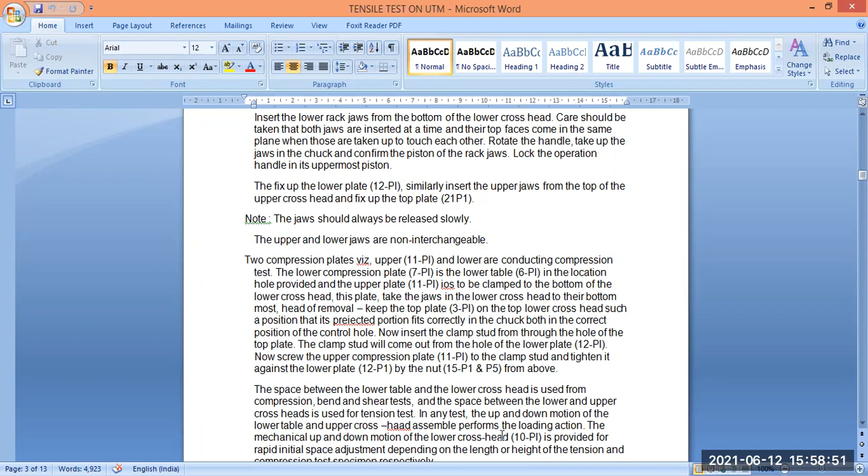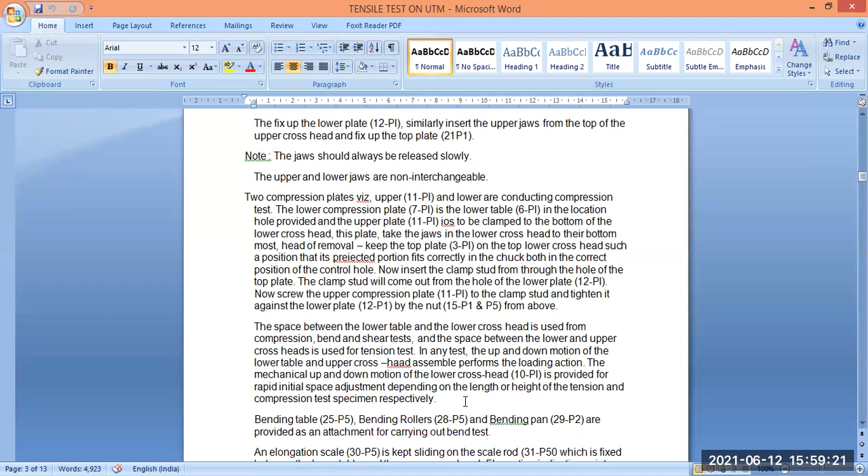The mechanical up and down motion of the lower crosshead is provided for rapid initial space adjustment depending on the length of the specimen for both tension and compression tests. The bending table, bending rollers, and bending pins are provided as an attachment for carrying out the bending test.

An elongation scale is kept sliding on the scale rod 31-P5, which is fixed between the lower table and the upper crosshead. The elongation indicating pointer is fixed to the lower crosshead and reads the scale on the side of the rod when loading the specimen. Limit switch 4 is provided below the lower table for indicating the maximum stroke of the piston.

So, what is that? A scale is provided, kept on the scale rod, which is fixed with the lower table and the upper crosshead itself. Actually, in our electronic tensile device, this doesn't operate, but this movement is available from our control panel itself.

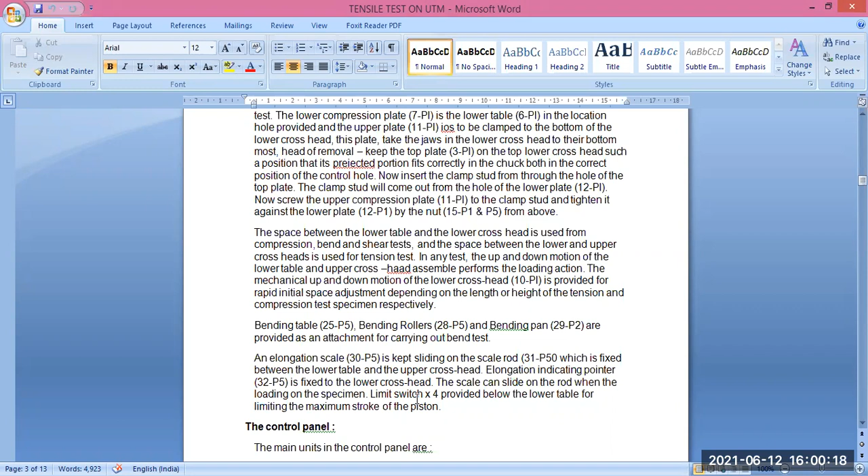So, the control panel: first of all, the main units of the control panel are like this. The oil tank, which contains the hydraulic oil level sight glass for checking the oil level, is fitted to the oil tank itself. The filter fitted to the oil tank cover filters the incoming oil to the tank.

The oil tank contains the hydraulic oil level sight glass, which can show you how much oil is there in the machine, or if there is any leakage. It is fitted to the oil tank for checking the oil level. There is a maximum and minimum limit; if it goes below that, you have to add oil, and you should not fill the oil more than the upper limit.

The filter fitted to the oil tank cover filters the incoming oil to the tank. A drain cock is provided to take out the oil while cleaning the tank. Sometimes you have to clear the oil from the tank and replace it with new oil, for which there is a drain cock to remove it from the bottom.

Now, the pump is a positive displacement type pump. This rotary pump moves in a positive direction; it does not have any reciprocating system. This assures continuous, high, non-pulsating oil flow for the smooth application of the load on the specimen. So this pump ensures smooth feeding of the oil, without any jerk, inside the piston cylinder, and that is transferred to the machine top and bottom crossheads to ensure uniform tensile load, uniform compressive load, or bending load.

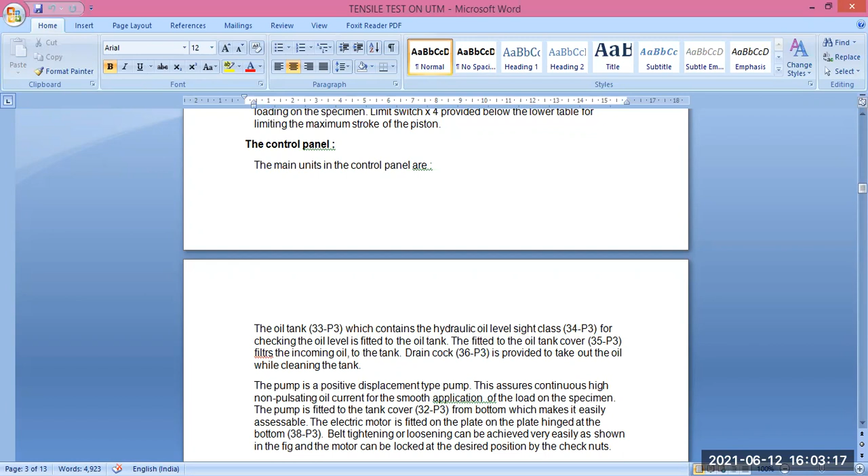There are two valves in the control panel. I have shown you one on the right side, another on the left side. They are used to control oil flow in the hydraulic system. The right side valve is the pressure compensated flow control valve, and the overload valve is just adjusted and is locked.

The left side valve is a return valve. The valve allows the oil from the cylinder to go back to the tank, thereby reducing the pressure in the cylinder, and then the working piston starts coming down. The oil delivered by the pump passes through a flow control valve, and if it is in open position, to the cylinder, and the piston goes up.

So the rate of oil delivered by the pump we can control by a flow control valve. If it is in open position, oil goes to the cylinder and the piston will go up. When it meets the resistance of any test piece, pressure starts developing until the specimen breaks under the load.

The things are very clear. We are just pumping the oil inside and sending it through the cylinder by means of its own pressure. By opening the control valve, it starts moving up, and along with it the top member, top crosshead and bottom crosshead move, creating compressive, tensile or bending load.

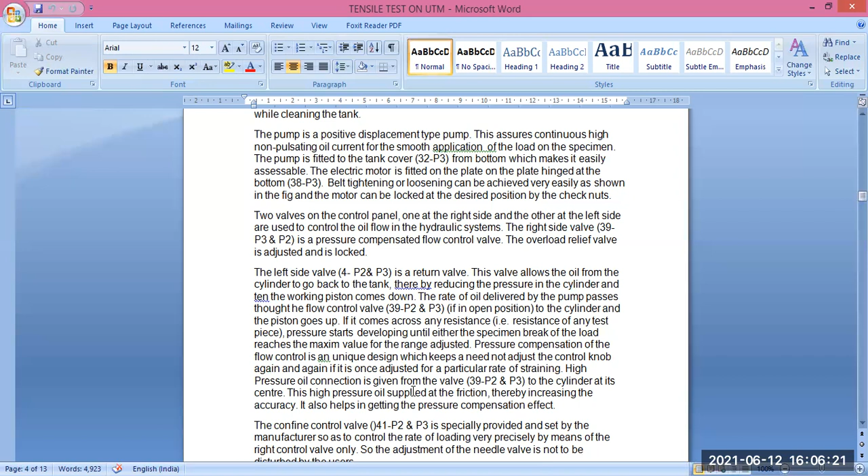So, pressure oil connection is given from the valve itself to the cylinder at its center. This high pressure oil is supplied at the friction, thereby increasing the accuracy. It helps in the pressure compensation itself. The control valve is specially provided and set by the manufacturer so as to control the rate of loading very precisely by means of the right control valve itself.

Just 1 second for the attendance. Now, oh.

Now let us go for the dynamometer. It is a unit which measures and indicates the load on the specimen. We are applying tensile load or compressive load on the specimen itself. The overall accuracy of the machine depends mainly on the accuracy of this unit itself.

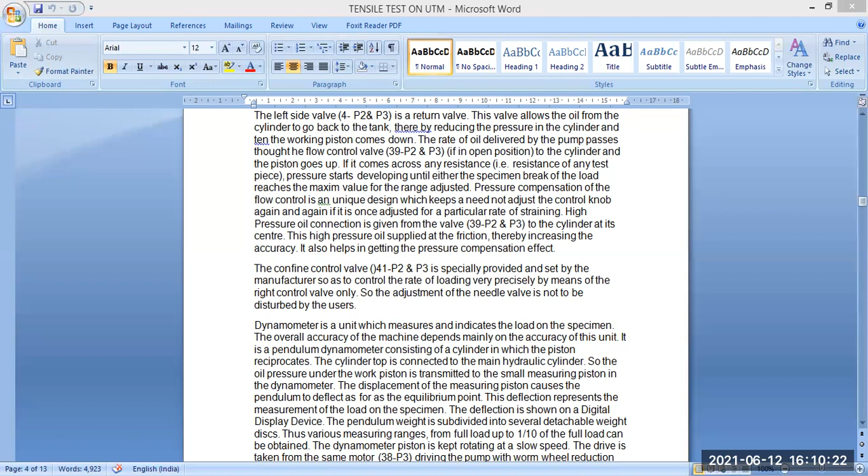This pendulum weight is subdivided into several detachable weights, and thus various measuring ranges, from full load up to 1/10 of the full load, can be obtained. The pendulum swing can be adjusted by the weight subdivided into several detachable weights.

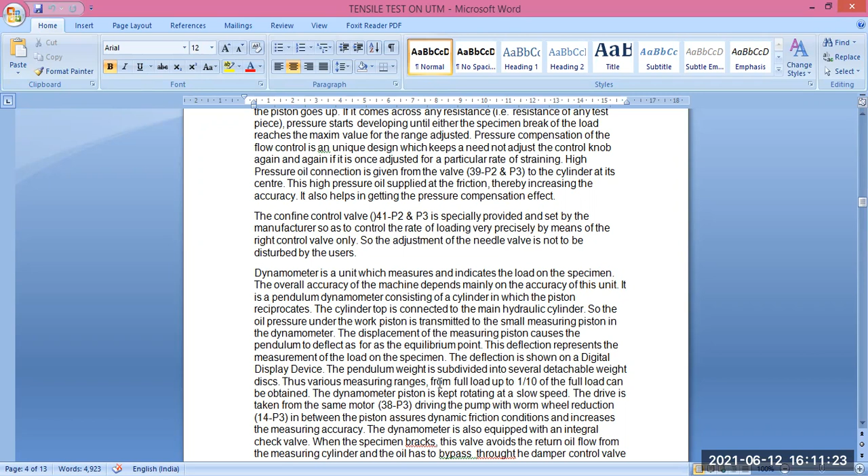The dynamometer piston is kept rotating at a slow speed. The drive is taken from the same motor driving the pump, with worm wheel reduction in between. The rotating piston assures a dynamic friction condition, and it increases the measuring accuracy. The dynamometer is also equipped with an integral check valve.

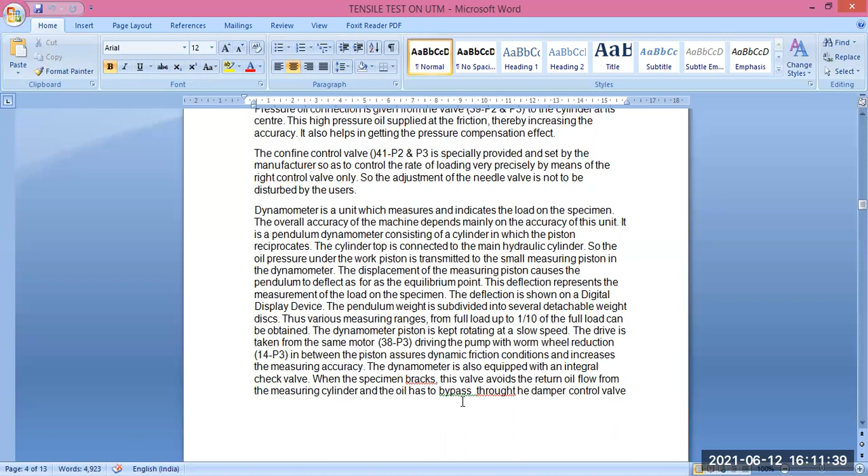When the specimen breaks, the valve avoids the return oil flow from the measurement cylinder, which has to be bypassed through the damper control valve, getting the damping effect, so that the weight should not go and strike. Both the top and bottom members go down slowly but surely, and should not strike somewhere else, because both of them are pretty heavy and big. If it strikes somewhere, it may break.

In addition to the accurate load indication on the scale, a recording instrument automatically registers the load-elongation diagram. So we have a recording requirement. A pen holder is there. The movement of the lower table is taken through the chain and sprockets without slip, as the specimen under test is elongated. Thus, an automatic graph of load against elongation is plotted.

A big size load indicating dial fitted with a glass cover is mounted at the side of the control panel itself. The range indicating dial located at the back side indicates the range to be adjusted at the particular load selected. This range adjustment knob is provided for the adjustment. The zero adjustment knob provided on the right side is for the initial zero adjustment. Now let us see how we are doing the testing.

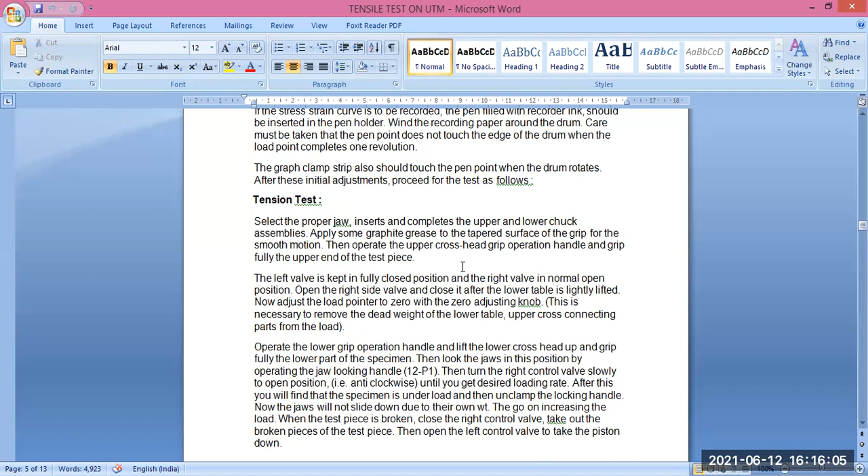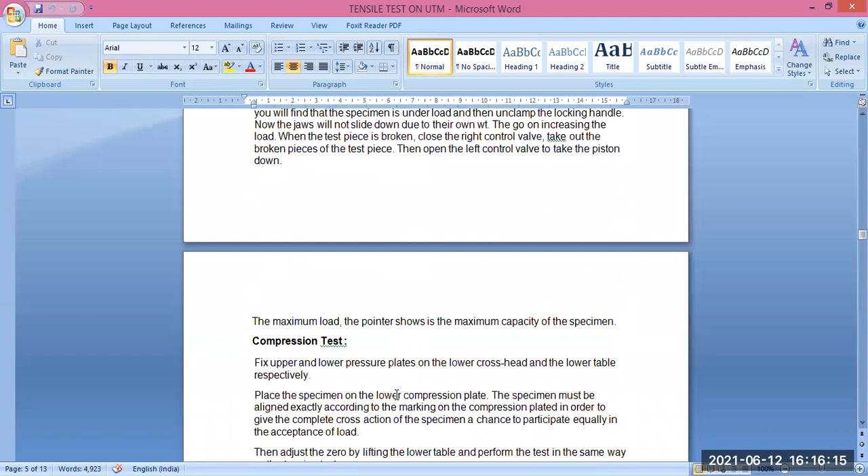When the test piece is broken, close the right control valve and then take out the broken pieces of the test piece. Then open the left control valve to bring the table down again. The maximum load pointer shows you the maximum capacity of the specimen itself. More or less, we are doing the same thing in the compression test.

Fix the upper and lower pressure plates on the lower crosshead and the lower table respectively. Place the specimen on the lower compression plate. The specimen must align exactly across the centre marking of the compression plate in order to give the complete cross-section of the specimen a chance to participate equally in the applied load. Then adjust zero by lifting the lower table and perform the test in the same way as the tension test.

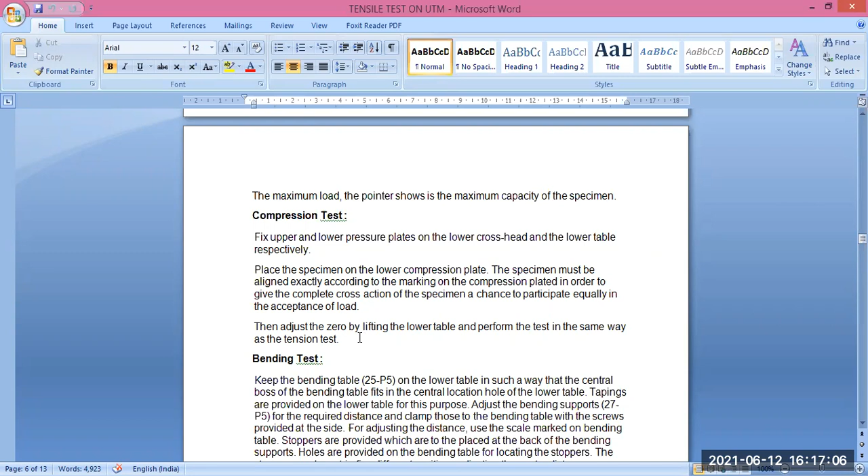Next, the bending test. Keep the bending table on the lower table in such a way that the center boss of the bending table fits in the central location hole of the lower table. Tapped holes are provided on the lower table for this purpose. Adjust the bending supports for the required distance and clamp the bending table with the screw provided at the side.

For adjusting the distance, use the scale marked on the bending table itself. Stoppers are provided which are to be placed at the back of the bending supports. Holes are provided on the bending table for locating the stoppers. The stoppers can be set in 5 different positions.

Stoppers can be placed at the back of the bending support. The holes are provided at the bending table and the stoppers can be set in 5 different positions, adjusting the center distance between the supports at intervals of 100 mm. Fix the required bending pin at the lower side of the cross head and adjust the zero by lifting the lower table, and perform the test in the same way.

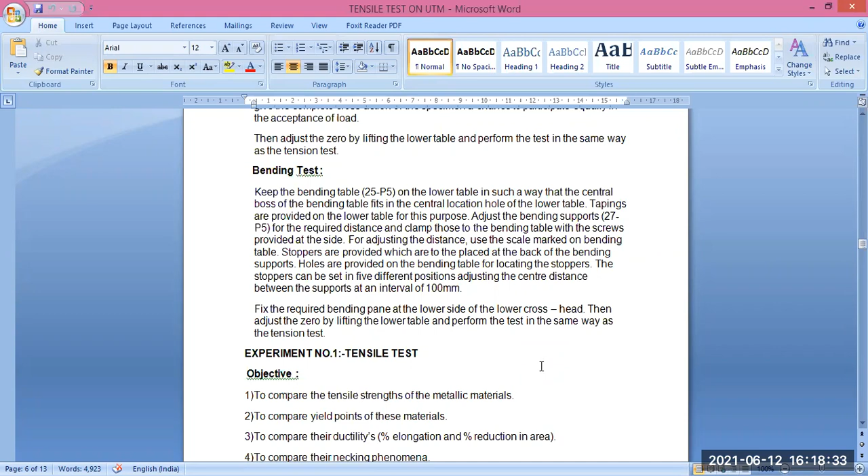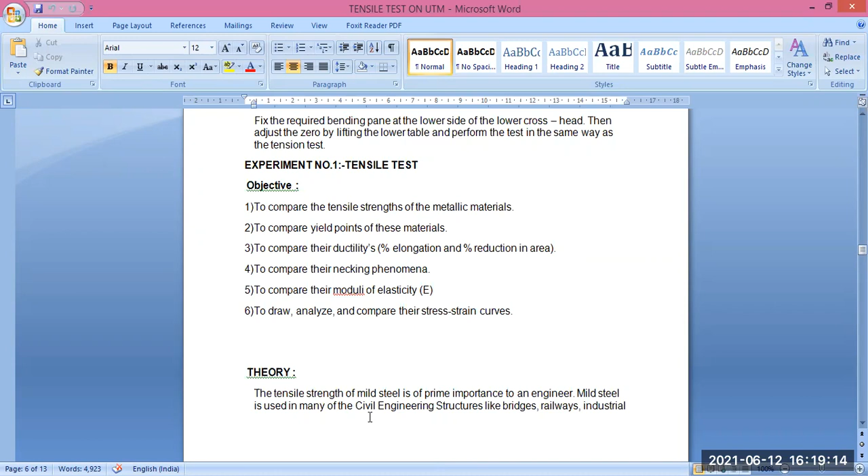Now let us go through experiment number 1. What is this? The tensile test. The objective is to compare the tensile strength of the metal. To compare, what is the objective? Tensile strength. Compare the yield point of this metal. Compare the ductility, which is elongation per unit length, and percentage of reduction in area. Compare the modulus of elasticity, and draw, analyze, and compare the stress-strain curve.

Theory. The tensile strength of mild steel is of prime importance in many civil engineering structures like bridges, railways, industrial buildings, etc. Mild steel is subject to direct tension due to bending in some of the components of the aforesaid structures. Determination of the shapes and sizes of these components requires knowledge of capacity and deformation consistent with specifications for safety

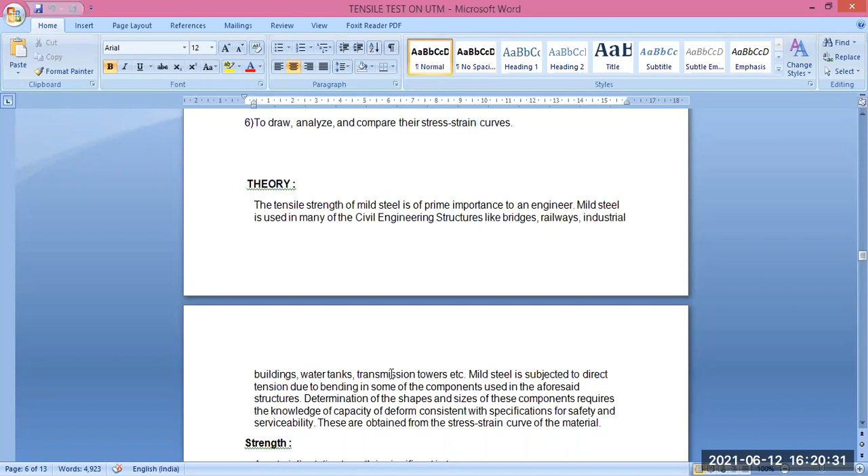and serviceability. So what we are saying, we are doing the test of mild steel, which has a lot of applications: bridges, railways, industrial buildings, water tanks, etc. It is subject to direct tension due to bending in some of the components of the aforesaid structures. Determination of the shape and size of these components requires knowledge of capacity and deformation consistent with specifications for safety and serviceability. These are obtained from the stress-strain curve of the material itself.

The ultimate tensile stress of a material is the strength it is capable of exerting against being fractured, that is, being broken in service. A material's static strength is signified in two ways: resistance to permanent deformation. This kind of strength tends to prevent bending, twisting, or denting of material permanently in service. On the other hand, the yield point stress must be reached or exceeded during the manufacturing of metal products.

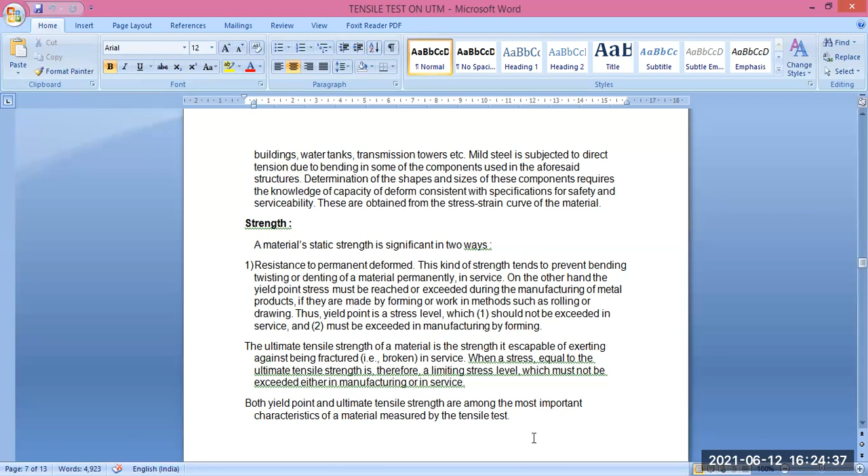Ductility is the property which a material must possess, at least to some extent, in order to be formed into different shapes by rolling, stretching, bending, drawing, hammering, etc. Simply put, it is the ability of a material to be drawn into a wire or shaped by other non-cutting, non-melting methods. Ductility is therefore a very useful, often necessary property.

The tensile test provides two methods of measuring the specified degree of ductility which a metal possesses. One measures ductility in terms of the percentage elongation of the specimen, and the other in terms of the percentage reduction in its cross-sectional area. Percentage elongation measures the lengthwise stretching of the tensile specimen up to the time of fracture, expressing the increase in length of a measured portion of the specimen as a percentage of the original gauge length.

So what is this saying? The tensile test provides two methods of measuring the specified degree of ductility a material possesses — how much ductility is available. One measure is percentage elongation: how much the specimen can elongate. The other is percentage reduction in cross-sectional area. So you derive two results: how much the specimen elongates per unit cross section, and how much the cross-section area reduces before breakage.

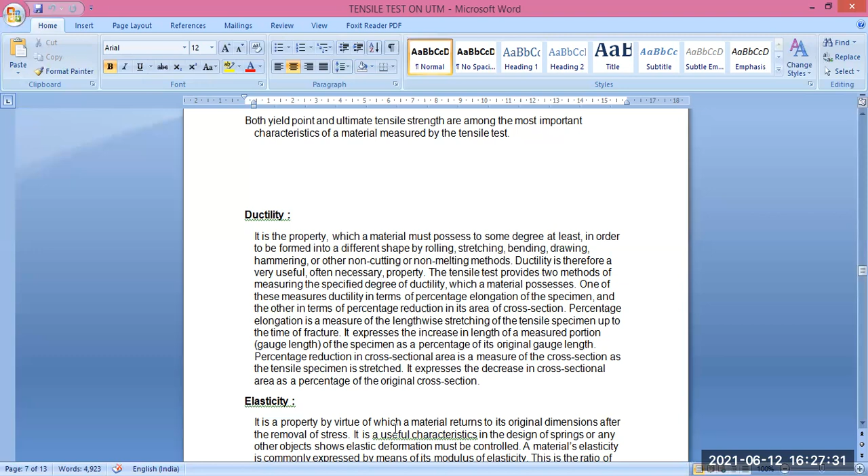Elasticity is a property by virtue of which a material returns to its original dimension after removal of stress. It is a useful characteristic in the design of springs or any other object showing elastic deformation, and must be controlled. A material's elasticity is commonly expressed by means of the modulus of elasticity.

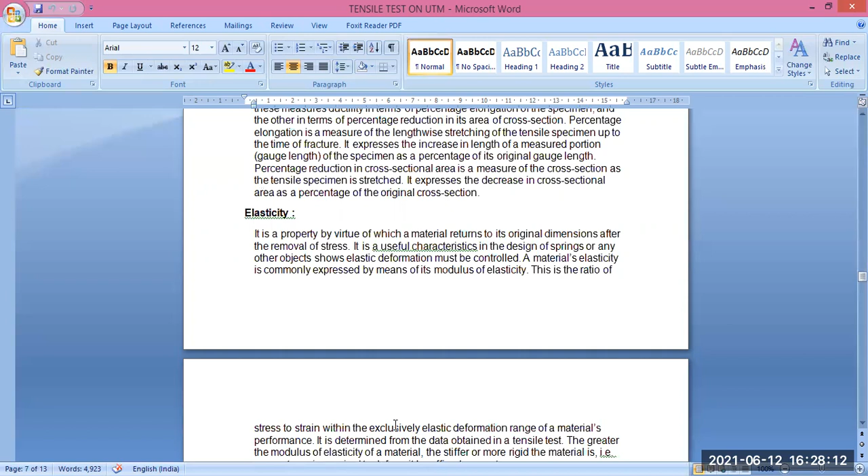This is the ratio of stress to strain within the exclusively elastic deformation range of the material's performance. It is determined from the data obtained in the tensile stress test. The greater the modulus of elasticity of the material, the stiffer or more rigid the material — that is, more stress is required to deform it by a fixed amount.

So elasticity defines how elastic the material is, how quickly it can return to its original form after deformation, and it is determined from the data obtained in the tensile stress test. The greater the modulus of elasticity of the material, the stiffer or more rigid the material itself — that is, more stress is required to deform it.

The stress-strain curve: as part of the tensile stress report, it is often necessary to draw a stress-strain diagram. This diagram shows the performance of the tested material by graphically expressing the stress existing in the specimen as a function of the strain developed during the pulling action of the testing machine, from the start of pulling to the occurrence of fracture.

The shape of the stress strain diagram indicates the general characteristics of the tested material as well as its specific engineering properties. To draw the complete stress strain diagram, suitably sized stress and strain scales should be selected, but we can do it from our computer display device.

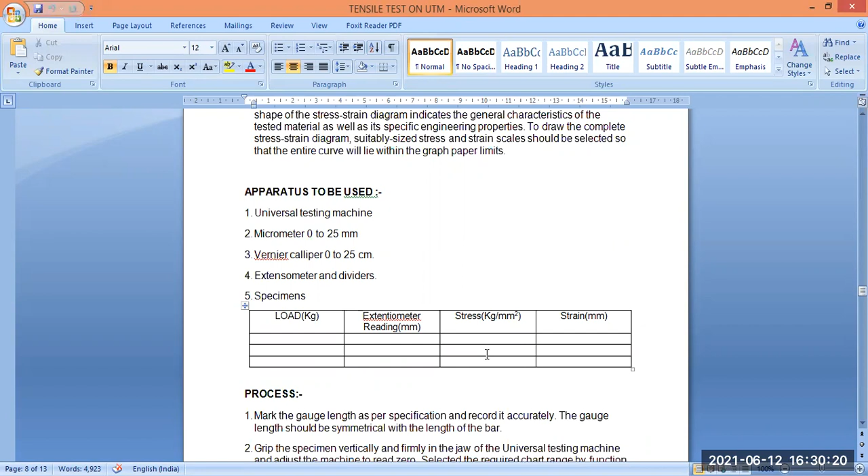Next, the apparatus to be used here includes the universal testing machine, micrometer 0 to 25, vernier caliper 0 to 25, extensometer, and dividers. Load, extensometer reading, stress and strain are all to be plotted for at least three different materials.

Now, what is the process? Mark the gauge length as per specification and record it accurately. The gauge length is the length between the two dumbbell areas, because the dumbbell area is not made for the tensile test but to grip the specimen properly. The gauge should be symmetrical with the length of the bar.

Grip the specimen vertically and firmly in the jaw of the universal testing machine and adjust the machine to read zero. First, make certain movement of the machine for a few millimeters, then release it. It will go to zero, and then set the zero point on your machine.

Select the required chart range by the function capacity changing wheel with the ram at the bottom of the stroke. Raise the ram a few millimeters by quick setting control and set zero.

Note that the zero will change as the ram rises due to the weight of the column of oil in the cylinder. Note that the grips do not protrude through the grip holders, and insert the specimen not less than two thirds of the way into each pair of grips.

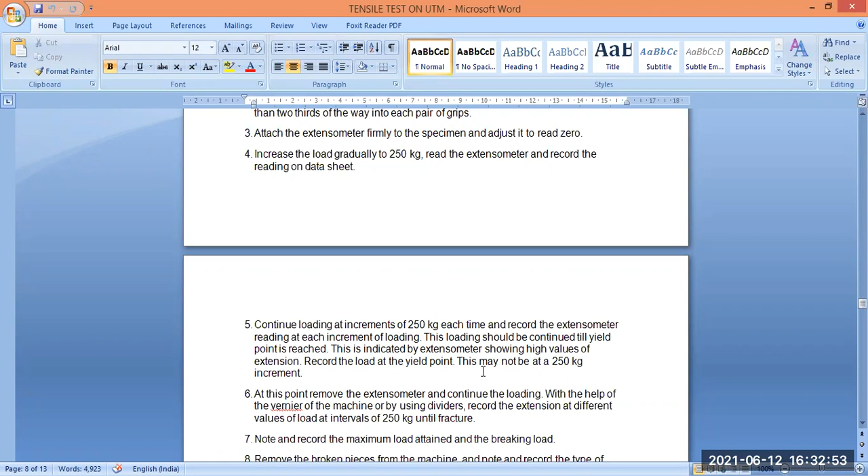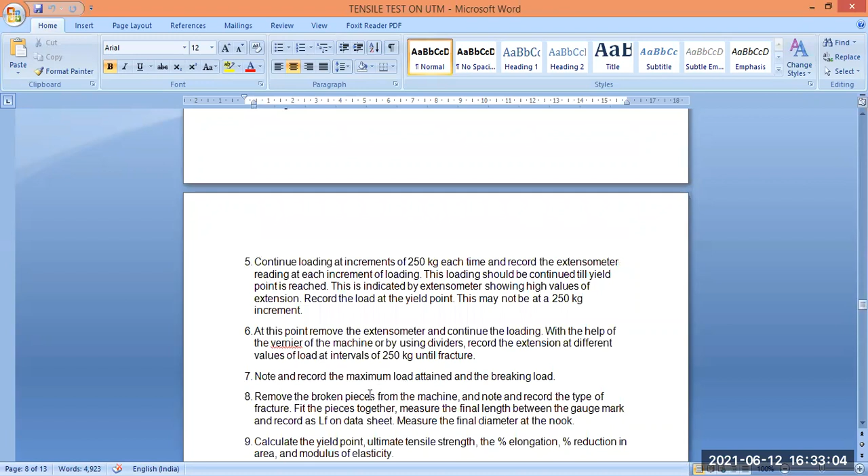At this point, remove the extensometer and next record the maximum load attained at the breaking point. Remove the broken parts from the machine and note and record the type of fracture.

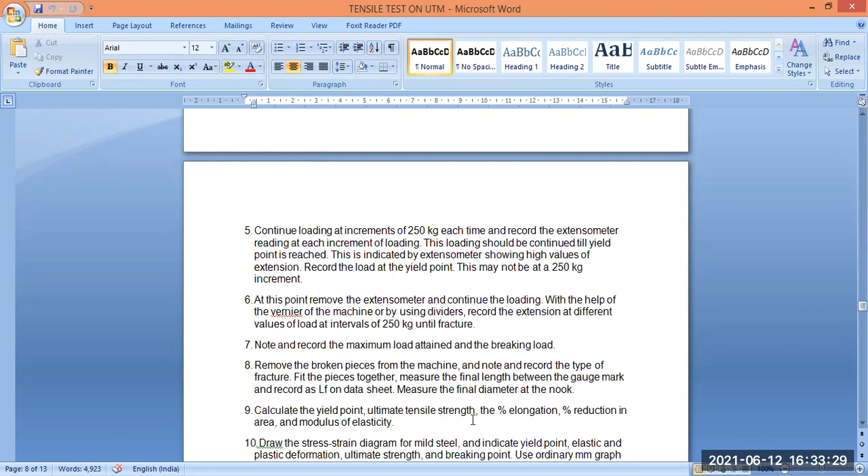Fit the pieces together, measure the final gauge length and record it as LF on the data sheet. Measure the final diameter of the neck by means of the micrometer. Calculate the yield point, ultimate tensile stress, percent elongation, reduction in area, and modulus of elasticity.

Draw the stress strain diagram for mild steel and indicate yield point, elastic and plastic deformation, ultimate strength, and breaking point. Use ordinary millimeter graph paper. Repeat procedure steps 2 to 12 for gray cast iron, brass or copper, and aluminum specimens.

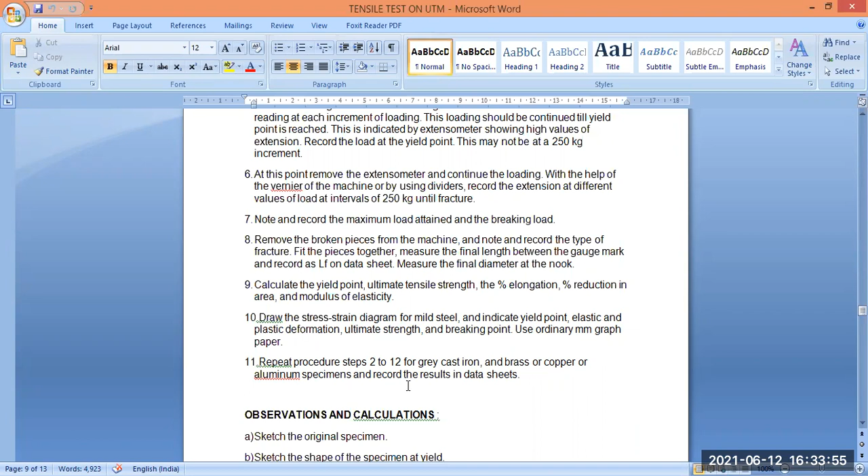So, what is the observation? Sketch the original specimen, sketch the shape of the specimen at yield, sketch the specimen after failure, plot the stress-strain curve, determine the yield strength and breaking ultimate strength, and determine the modulus of elasticity of the material.

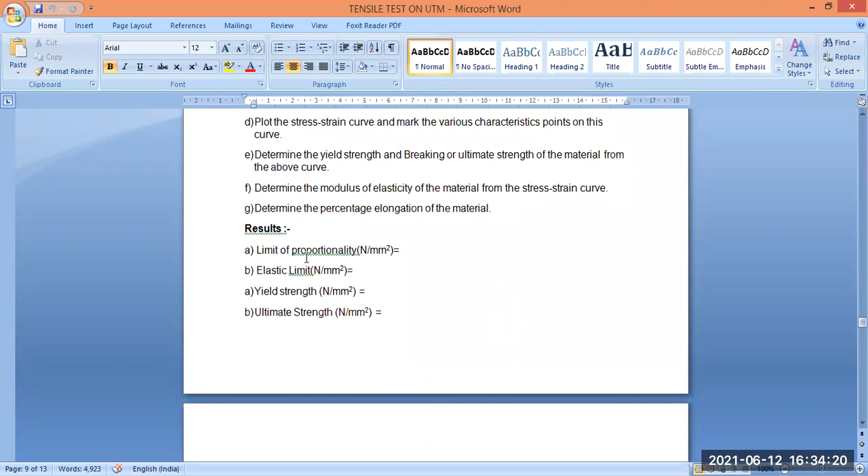What are the results? Limit of proportionality, elastic limit, yield strength, ultimate strength - these are your results, along with modulus of elasticity and percent of elongation.

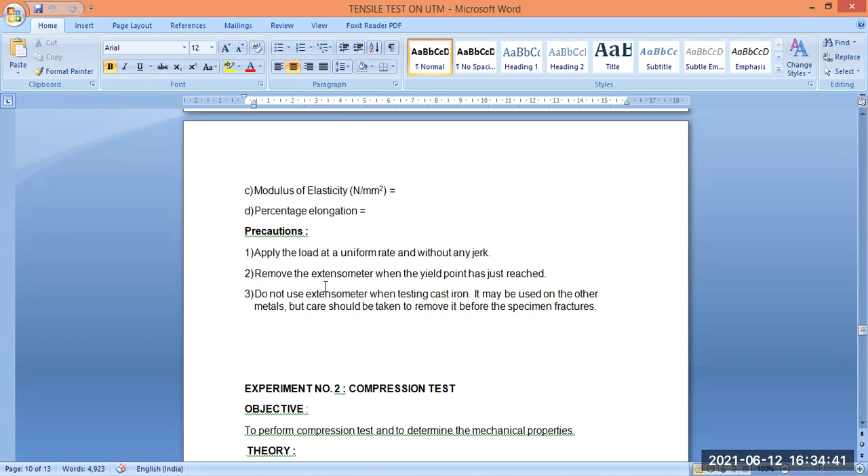What are the precautions? We have to ensure we apply the load at a uniform rate and without any jerk. Remove the extensometer - do not use the extensometer while testing cast iron.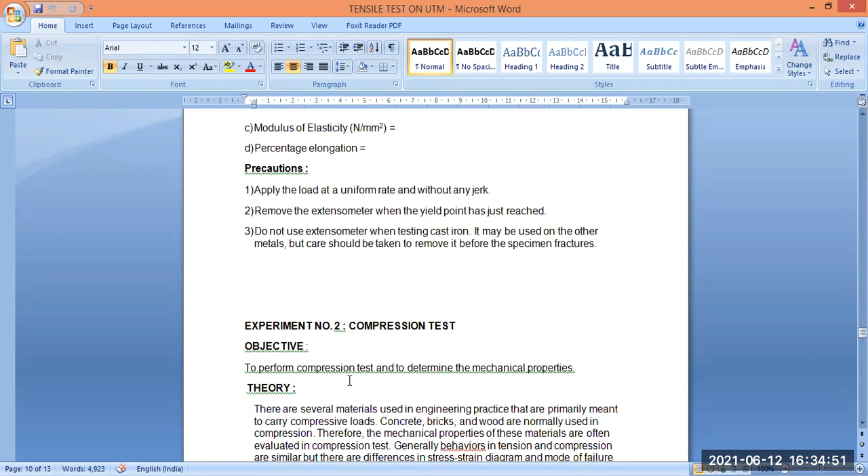Next experiment is the compression test. Objective: to perform the compression test and determine the mechanical properties. Theory: several materials used in engineering practice are primarily meant to carry compressive load, say concrete, brick, and wood. They are used in compression but not in tension.

Therefore, the mechanical properties of these materials are often evaluated in the compression test.